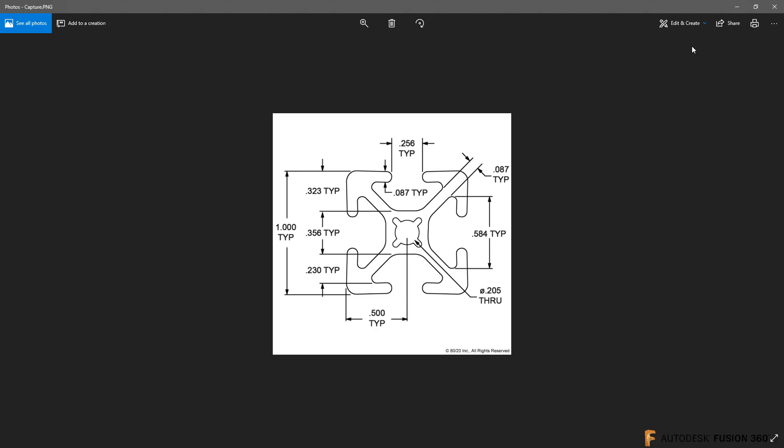So let me close this picture down here. Now, in the past, in my previous life, I would have printed this out on a piece of paper and kind of had it laying next to me. But what I actually prefer today is to bring it right inside of Fusion and use it as a reference. And I would also do that if it was something more - this was just like one view, but if you had multiple views in a 2D drawing, I think I still like to bring it into Fusion.

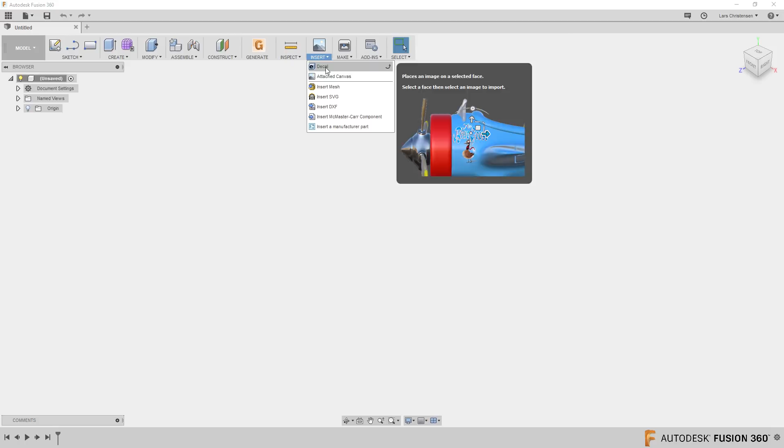So what I'm going to do is I am going to go up to this insert button, and there is an insert canvas and insert decal. Now insert decal is more like a sticker on your 3D model, where canvas is a 2D picture for you to draw something up on it. So let me click on this. And when you get this dialog box, a lot of you guys have already seen this, some of you guys haven't - the first thing that always, just start from the top and work your way down. So the first thing it says is select the face to draw on.

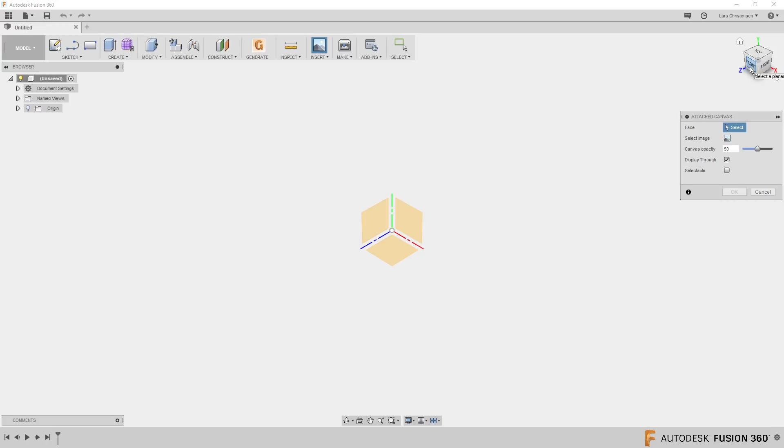And that doesn't really matter. I'm going to select this front face right here. And I call this the front face because I'm following the view cube, right? So I will select that. Then it asks for your image, so I'm going to click on this little picture here. And you will see I have the image that I just showed you - here's the 152 banner, but we're going to do the picture instead. So double click on that. And you will see that shows up on the screen down here.

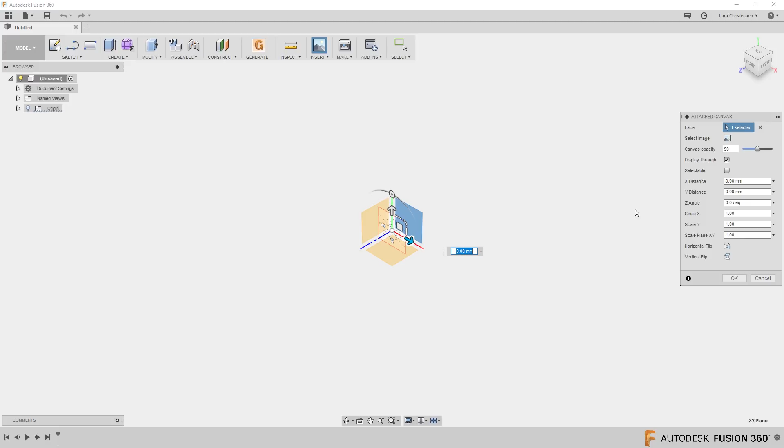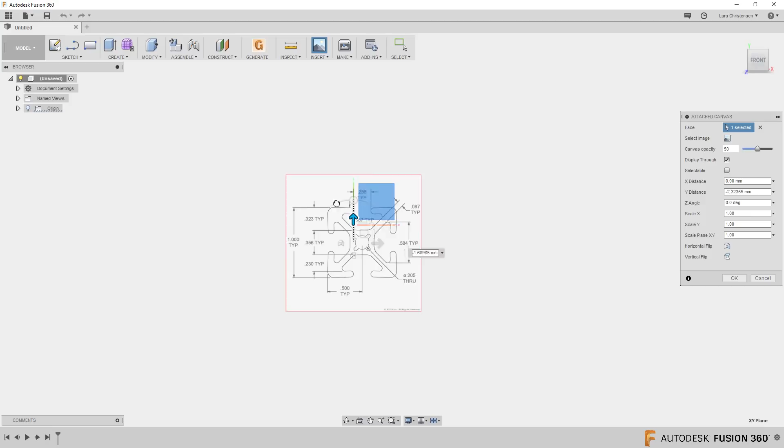Now, another thing that I should point out right now is that you can, let me just click on the front here so we can zoom in a little bit. You can choose the opacity of the image, so how sharp or how opacity should be. I normally like mine about 50%. Now I'm going to say okay, you can scale in here, so you get some handles. You can pull up and down here, you can pull over here. The square will actually let you move it around, or you can scale it on this corner here. I would actually just place it right now. Okay, so now it's just sitting somewhere.

Then I will go over to the left and turn my origin on, because I still want my part to be tied into the origin. You'll see that the origin comes down here. It's a little out of the way, but here's a neat trick.

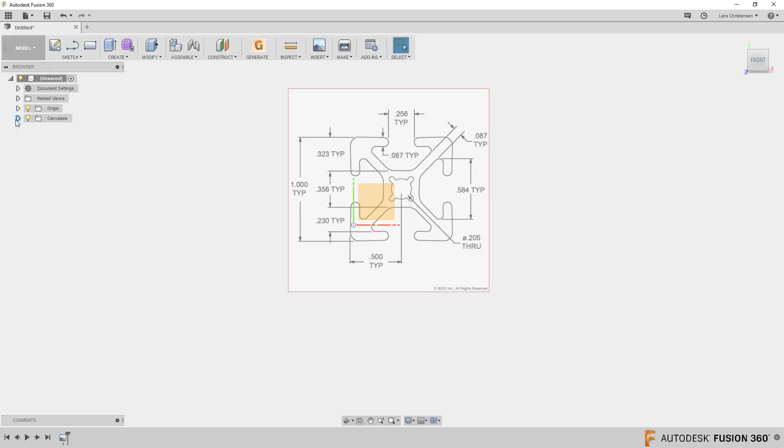If I open this up, you'll see I've got a canvas folder now because I have that image. If I right click here, I get a couple of menus or functions you should be aware of. The first one is edit canvas, which is what we were just in. The second one is calibrate, so I'm going to select calibrate.

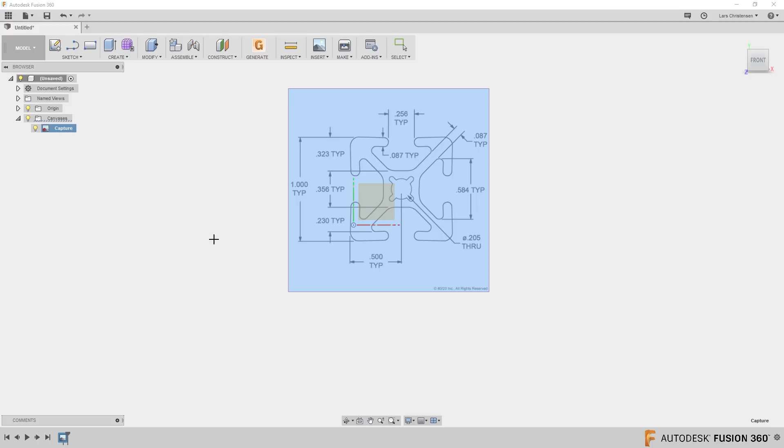Now it's important to say, let me zoom in a little bit, that this image is just an image. It's pixelated, so there's nothing I can pick. It's literally just like a picture. So this calibrate canvas isn't going to be 100% correct, but it's actually pretty neat for me to work with.

So I'm going to move my cursor down to the top of this. You can see we have a 1 inch thickness, or whatever you want to call it, on this rail. I'm going to left click once, then left click down on the bottom here, trying to be somewhat straight down from that original point, and I get a dimension up here.

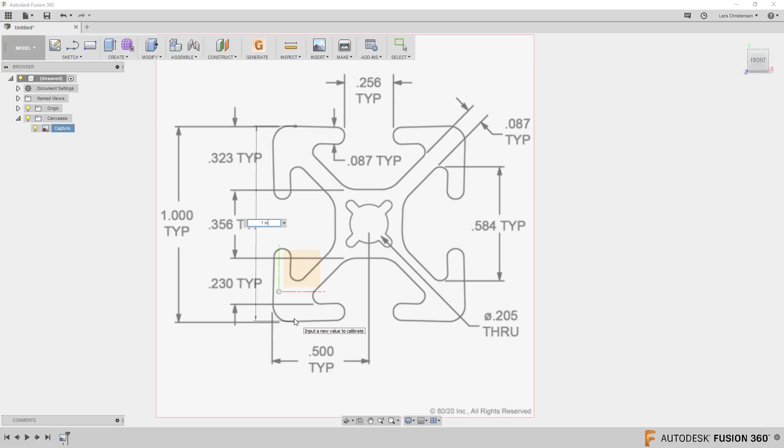Now this is when I realize my template is in metric, but I actually want to do this in inches. Isn't that typical? If you didn't know, you can type 1, then spacebar, then type IN, and it will automatically convert this to inches. So when I hit enter, this scales the image to be 1 inch over where I just clicked with the calibration tool. I hit enter, and you can see how it came right at you there.

So two things: I did that by right clicking and hitting calibrate. And the other thing I just realized is I wanted this in inches, not metric. I normally try to do metric, but for ease, this will be an inches series. If you ever want to change your standard, just click up here on this little icon, and you can change it over to inches, and the whole drawing will now be in inches. Just a little trick like that.

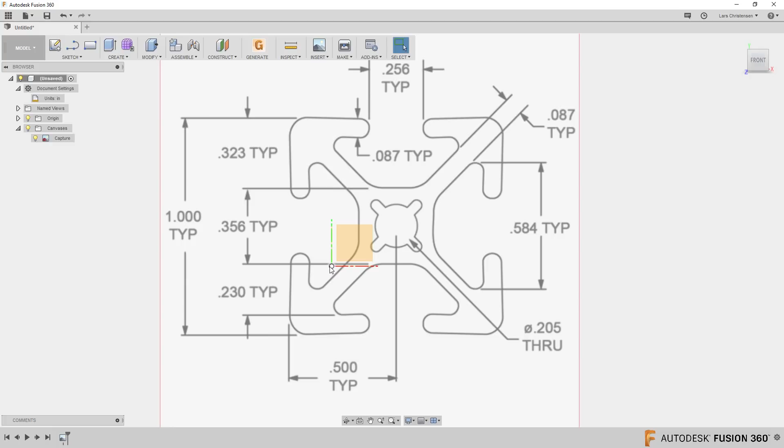Now I still haven't placed this part where the origin is, so I'm going to right click on the image again and hit edit canvas. That brings us back to the menu you saw in the beginning. Now I'm just going to take this canvas and bring it over somewhere where I think it looks pretty centered to that inner circle there. So these are the steps, and I'll hit OK.

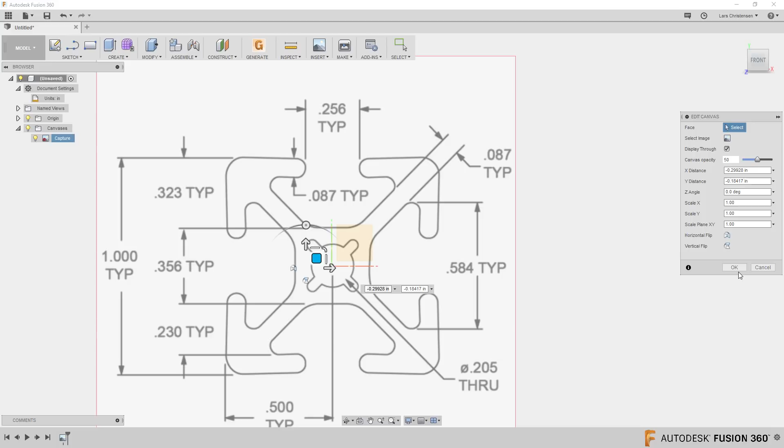This is the process that I use instead of sitting there fighting with a drawing on the table, looking up and down — this is actually a little bit easier. I'll do one later on where there are different views, like a standard 2D drawing. Okay, so we got this.

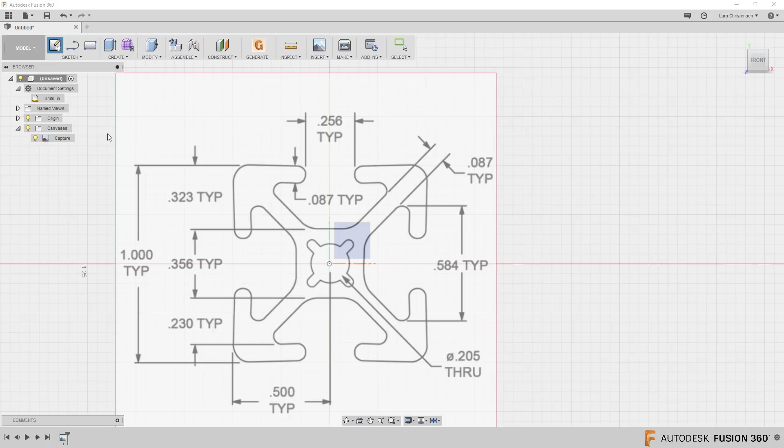Now, the reason I like to bring this drawing in is I can use all these different dimensions as an easy reference. Let's start with the center hole here — 0.205 is the diameter of that. So I'm going to open a new sketch, select that face, hit C for circle, snap it into the origin, draw it out, and type in 0.205 since we get the diameter right there on the cursor. That gives me my first indication of how close I am, and I'm a little off, but that should work okay.

Now let's start talking about laziness when it comes to drawing things up like this. For any of you who know me, I like to be lazy when it comes to CAD and CAM. This was something I didn't pay much attention to in my previous life, and I think I probably should have — and that is symmetry.

We have 4 identical legs on this 80/20, and there's no reason to sit there and fight with all of those.

Let's just draw up this upper right one and then use some of the functions inside of Fusion, like patterning and so forth. So what I'm actually going to do is create 3 helping lines for that.

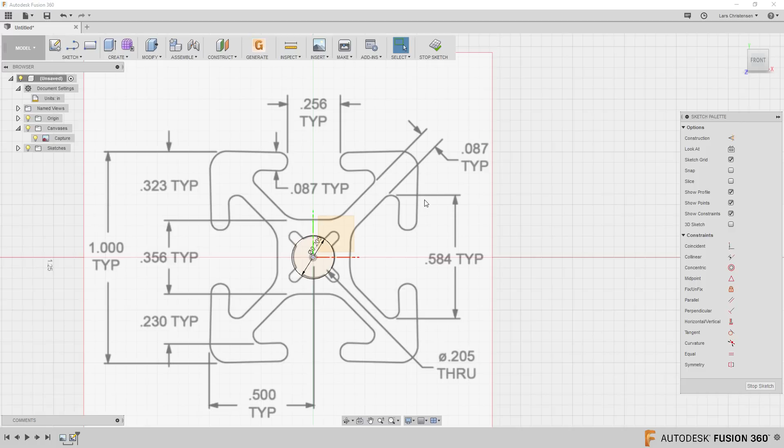I'm going to go up and select the line tool, snap into the origin, and draw a line up, making sure it snaps vertical. I'll double click to end that line. See, now it ended. If I don't double click, the line will continue.

For the horizontal one, I'm going to left click and go out here. Instead of double clicking, if I just do one left click, you can see it's ready to draw the next line. Then I could hit escape, or go down and hit the check mark. But a neat trick is to just double click.

Now, when I come to this line here, I'm going to draw a line going at an angle, 45 degrees. You can see in my measuring box, the blue box, I have the length activated, and a box on the other side for the angle. If you want to switch over to the angle, hit the tab key on your keyboard. That switches it over. I can type 45 degrees, hit enter, and now I have that line.

Let me just hide the canvas over here on the light bulb. So what we have is a line here, a circle, a line here, a line here, and a line here.

Now, if you come from other CAD systems, you would normally turn this into construction geometry because it's not really needed. You can do that in Fusion, but you don't have to. I used to do it all the time, and now I don't bother anymore.

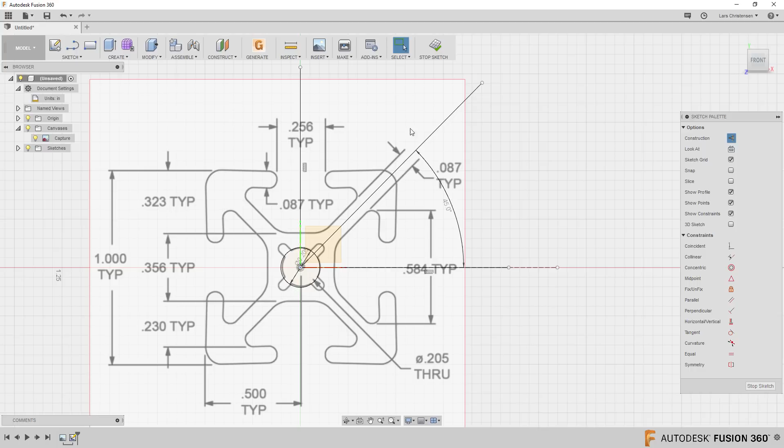But you could go over here and click construction, and turn this line into a construction line. If I hit this one, it doesn't show up... construction... oh, I don't know why I'm not displaying it right now. Hang on... okay, I don't know why it displayed. Well, don't worry about it anyway.

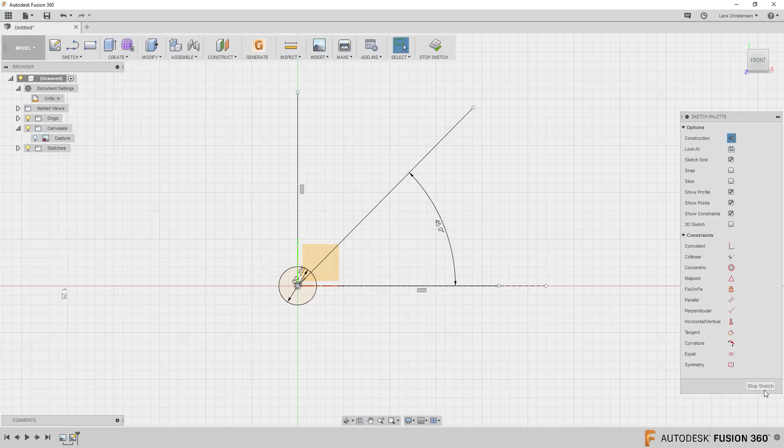You don't need it. Okay, so we got the vertical line here, we got the line here, it looks like this line here. I think this might be a reference to the angle line. I'm not sure. Okay, let's start sketching out here.

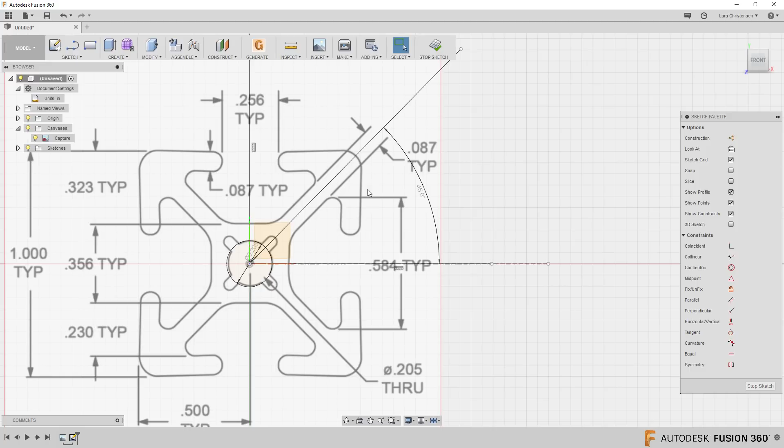So let me show you a couple of tricks with this. I'm going to click, and we're just going to do this right one right here. Let me click the line tool. I'm going to make sure that it snaps into that vertical line we created, and left click once.

I'm going to move out. Now here's a trick. I'm still in the line tool, and you can see I have this line here. Did you know that if you move the cursor back over to that endpoint, hold down the left mouse button, and start dragging, you actually get a tangent arc? But it never goes out of the line tool afterwards. This is something you might want to practice a little bit, but check this out.

So I'm still in the line tool. I move up to about where that radius starts, left click once. Now see here how the line tool is still active. I'm going to move back to the point, hold down the left mouse button, and now I'm actually getting a tangent arc drawn out here. Just get it kind of somewhere close.

I drew another line over, go back again to the original point, hold down the left mouse button, and I'm getting the arc again. So I hope you can see that. Go back over the point, hold down the left mouse button, and you get the arc. This is a quick way, especially for a part like this where there's all these arcs: hold down the left mouse button and drag around to get an arc, move a line up, hold down the left mouse button, and you get a tangent arc.

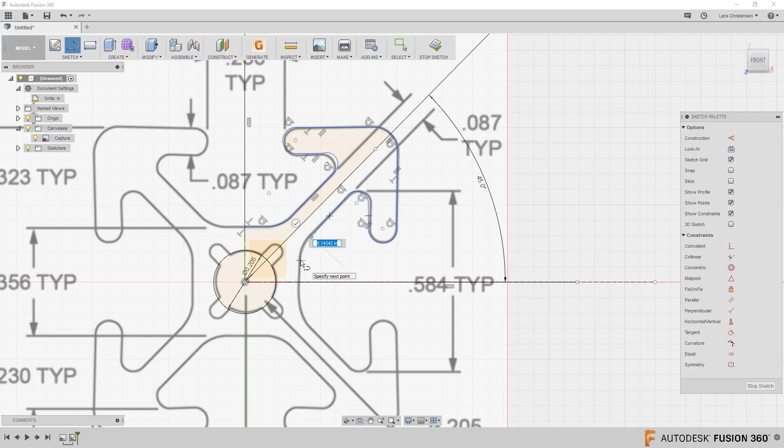Go down to this point here, left click, go back over, hold down, get a tangent arc, and then I'm going to close it off right down here. Now when I say close it off, you might be wondering what I mean by that.

If I hide this picture again, you'll see we have a change of color inside this part versus outside this part. That means it's kind of enclosed, like this light pink area. It's enclosed because we started here and ended down here. I hope that was somewhat visual.

So now we can agree that I drew up this outer shape fairly easily. Now when you've done that, the next thing you want to do - and I'm just trying to get it somewhat close right now - I'll take care of all the other dimensions later on as we're going into it.

My rule of thumb when sketching something like this is to first try to apply the constraints. That's all these over here, and you can see we've got a bunch on the screen before I start doing dimensions. All these symbols you see - if you're fairly new to Fusion, look at all the different symbols over here.

So that will show you what they all are. This one here is actually a perpendicular relationship, meaning this line is perpendicular to this line. Then we have one of the more important ones - that's a tangent one, meaning there's a tangency between the line and the arc.

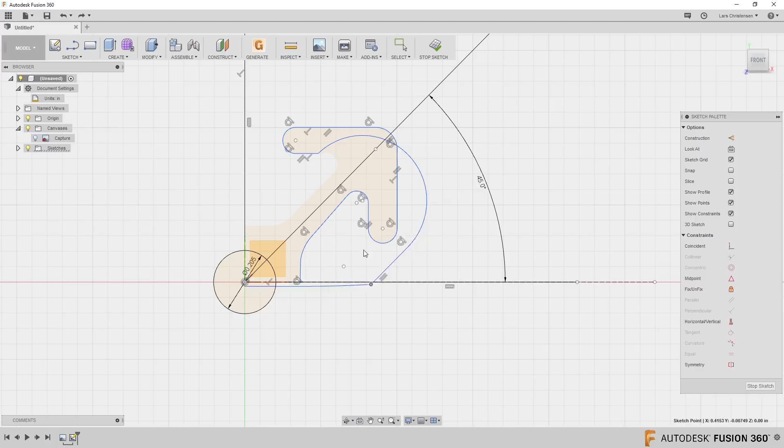Then we do a Control Z to undo that. Same thing, I can see I'm missing one down here. You can see how you place a dimension and suddenly things are blowing up on you. Control Z to undo. So this tangency normally ties that down.

So I'm going to go over here and select tangency. I'm going to select this arc and this line here, and I'm going to go up and select this arc and this line. Normally you have a tangency on each beginning and end of each circle.

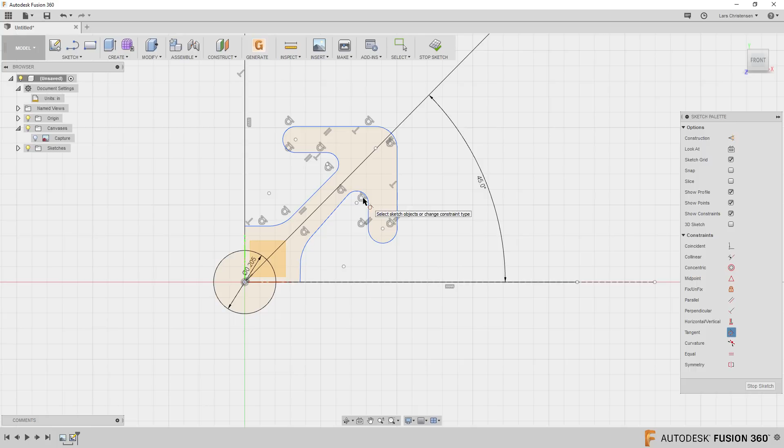So I'm moving around to see if we got all of them, and we're missing one down here. I'm just checking - this arc has this one, this arc had this one, this arc has this one and this one, and it looks like we need one down here also. There we go - that will at least prevent this sketch from blowing up.

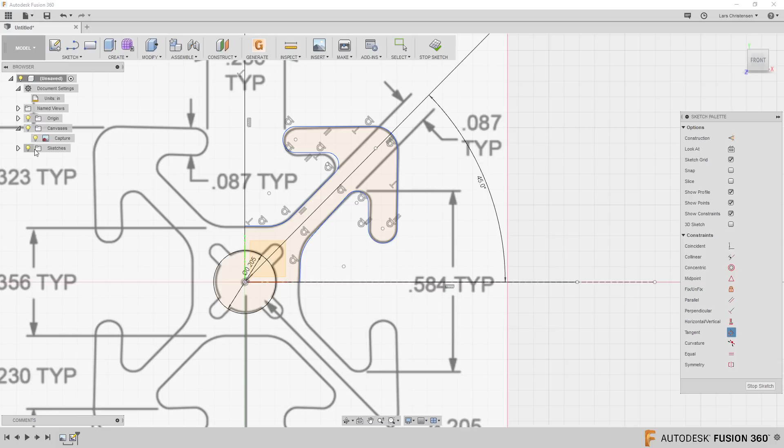All right, with that - I know I need some more constraints, but I'm going to show you a couple of different tips as we go along. Let me turn the image back on, and now we can start adding some dimensions to this. I don't think there's any specific rules for how you go about this, but maybe I like going clockwise around something like this.

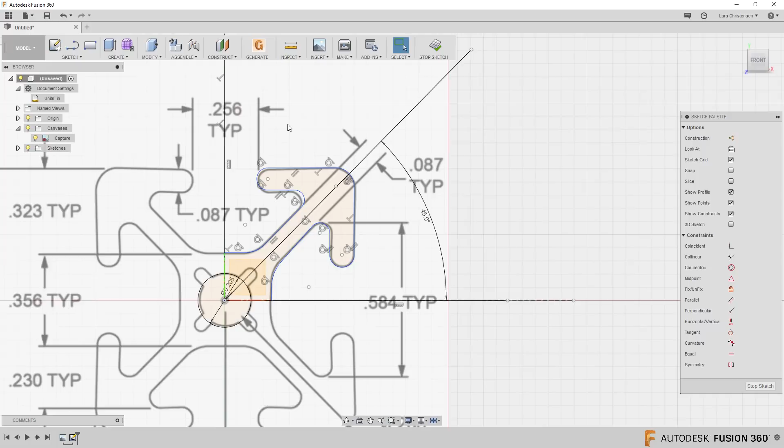So if we start out, some of these dimensions are actually going to repeat. Here we have a 0.256 between the tangency of these two.

If I hit D for dimension, I'm just going to use this line instead. Now if I just place a dimension to this arc, you'll see that it's center to the arc. Let me hit escape to get out of that.

The trick is D for dimension, select this line, then right click and select pick arc tangent, and now it will be tangent to that. We're going to do that a couple times. So here, now I'm going to type in 0.256 divided by 2 because I'm only doing half of this.

Let's continue moving around counterclockwise. So here we get a 0.087 between this line and this line. Now notice something, it might be hard to see, but next to my cursor it's actually showing up as an angle, 176.6 degrees. That's an indication we're missing a constraint to make this parallel.

This line here is, as a matter of fact, at an angle. So what we could do is create a parallel relationship between this line and this line. Now if I hit D for dimension and click here, you'll see we get something that looks more like what we're looking for, 0.087.

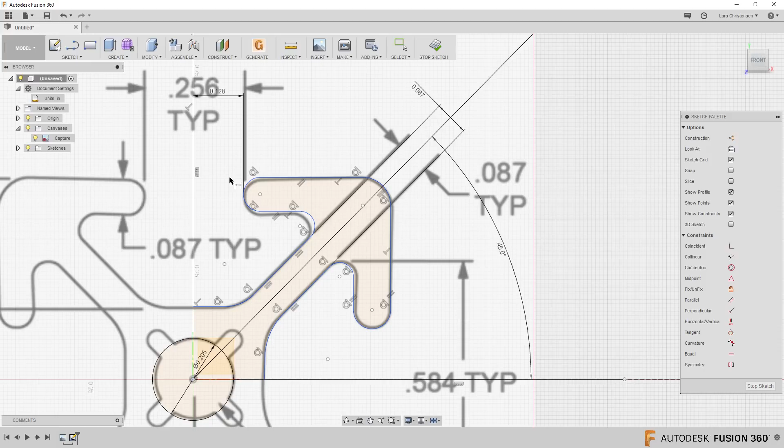This is another reason why I like to use the drawing in here—if I sketch to the drawing, everything should be fairly close to everything. All right, next one here is this 0.584.

We're going to do the same thing as before. We'll click on the horizontal line here, right click and select pick tangent so I can select the tangency of that arc. I'm going to type in 0.584 divided by 2 because I'm only drawing half of it. So now that dimension is there.

We can zoom out a little bit again. We already did that through hole—that's the first thing we took care of.

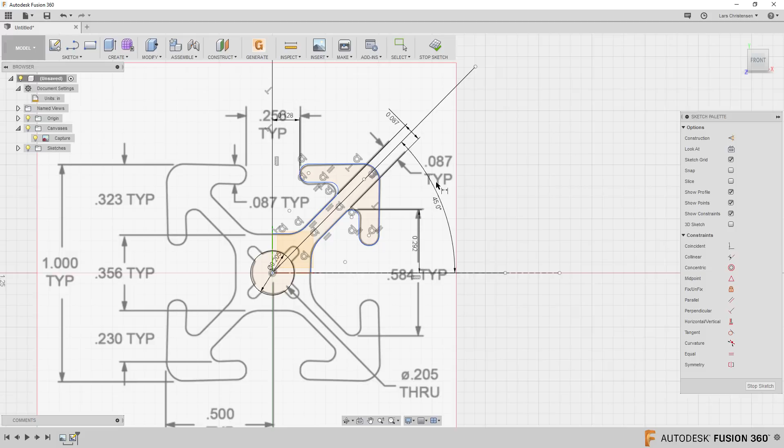Then we have a half inch from the center here out. That would be from this to this line here. I might just draw that out here—make that 0.5, hit enter.

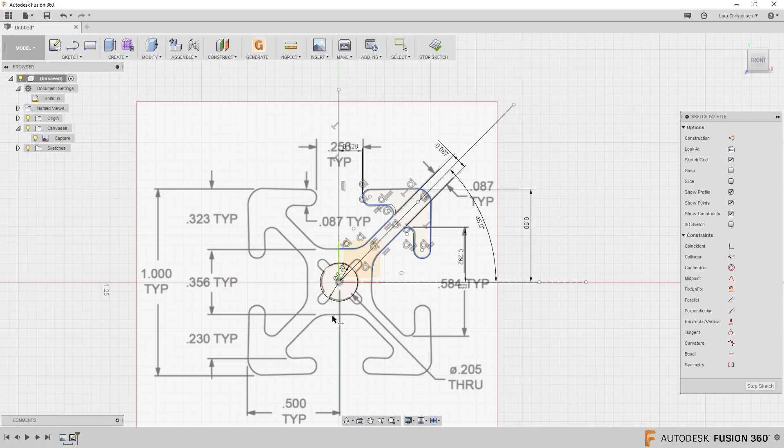Next, if we're moving around here, we have a 0.23. If you're looking at this, it's the distance from this area up to the top. So we can go in here, click here, go up and click on this area, and place that. So that's a little high.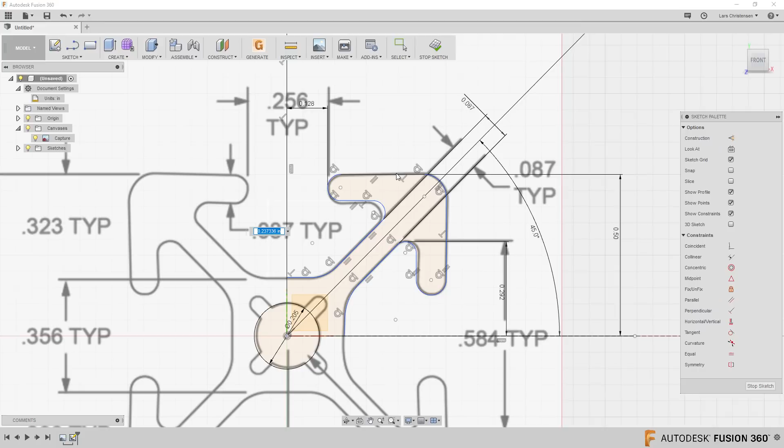Oh look at this, I got the wrong one—not to the outside, it's to the inside. Escape. This is one of the reasons you could go ahead and say D from here to here. What was it again? 0.23—got that one placed there.

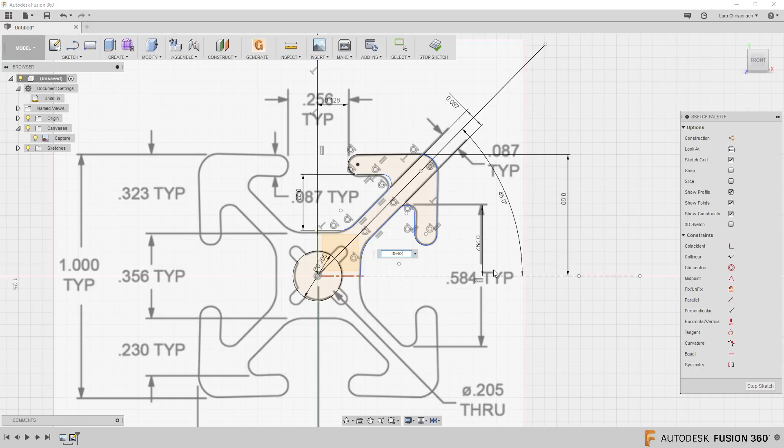That's good. Now the next one here is actually from this line, this one over here, the 356, to this line. That is going to be 0.356 divided by 2. And as soon as I did that, notice how this whole section here is now black.

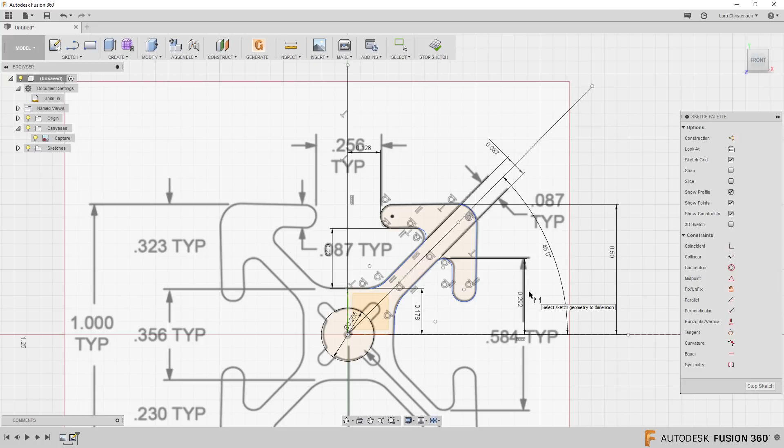That has now been fully defined, where this section over here is still blue. Okay, so now when I'm looking at this, I can start saying, since this is fully defined, that means some of these dimensions probably also play very well with the other side here.

If I place this, it's a degree, it's an angle. That gives me an indication that something is not right. That was what I just brought up before.

So I'm going to delete this one and say, you know what, this line here probably—I don't know if it's actually vertical. It probably is not. Let me go ahead and create a vertical relationship to that one. Let's hit D for dimension from here to here.

And now you will see we get a dimension. Now what you could do, instead of typing in 0.23 to make this the same, you could go up and click on this blue one, and you will see that it changes to D8. If I hit enter, you get a symbol called FX 0.23, and all that means is that this dimension controls this dimension. What that means is if I change this to 0.2, that dimension will update also.

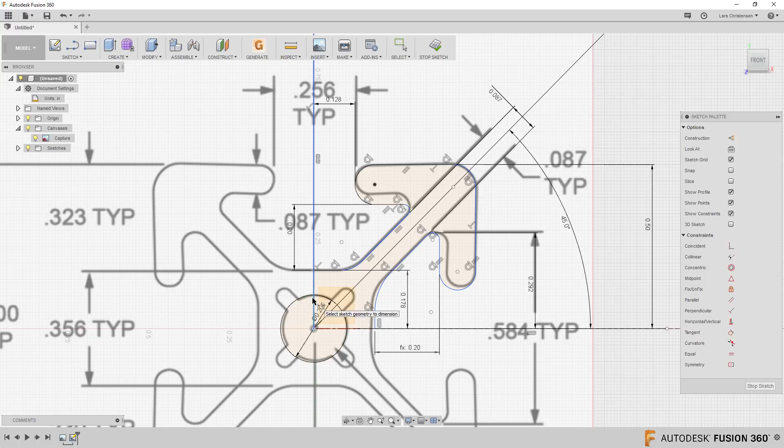So this can be a good way when you're modeling things up. Let me just hide the canvases for a second. This can be a good way when you're modeling things up. I change this to 0.23, I hit enter, and this one will update too. This is a good way of assuring that when you update, you only have to update one dimension, and others will update if you know that they're going to stay in the same row.

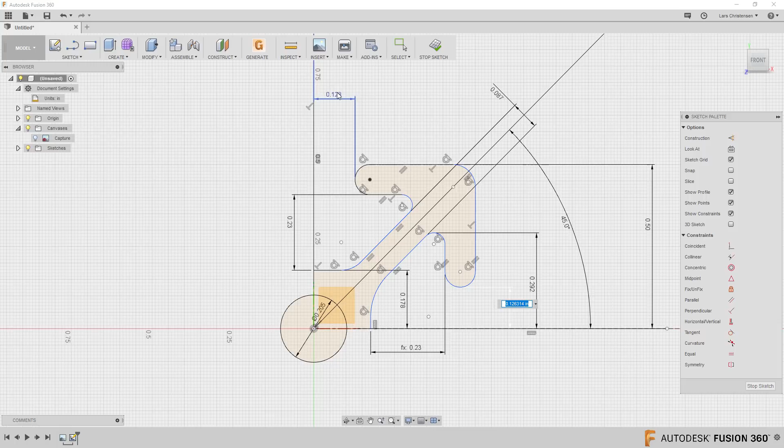That could be, if we continued with this 128 - if I do this dimension here, right click, tangency, select this tangency here, I know this dimension is going to follow this dimension. I can click on that, it changes to D3, and I hit enter. Now these two dimensions are controlling this one and this one. So I hope that this somewhat makes sense as a way to control this.

Same thing with a 1/2 inch - we can go over here and click this edge, that's also going to be 1/2 inch. You could go over again and click on this one over here, and you see that it becomes D6. That's just another way to try to control these types of dimensions. Okay, I hope this is useful.

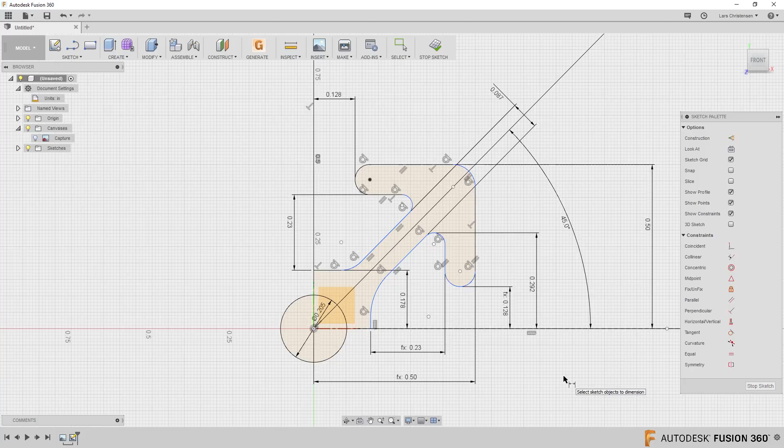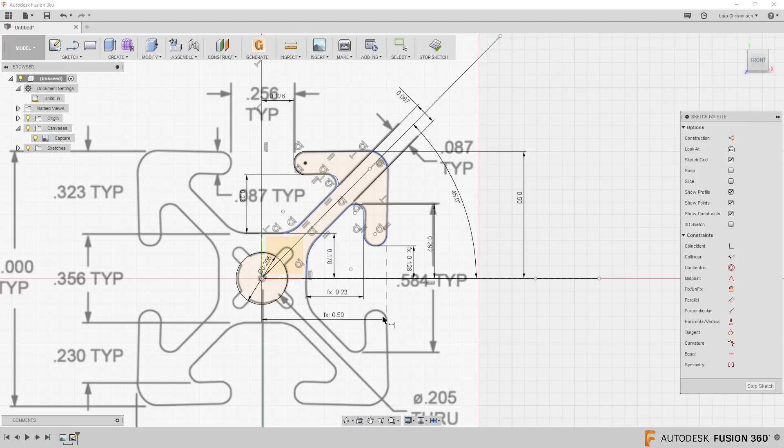Now I'm not sure I'm missing something. Did we ever do the 323? I'm not sure if I need that one to get it fully defined. I don't think I do - I think I'm missing one other dimension. So if you're ever unsure, you can always grab a corner here and start moving it. I think everything is blue right now because I haven't fully defined the radiuses. So let me just undo there, and let's put some dimensions on these radiuses.

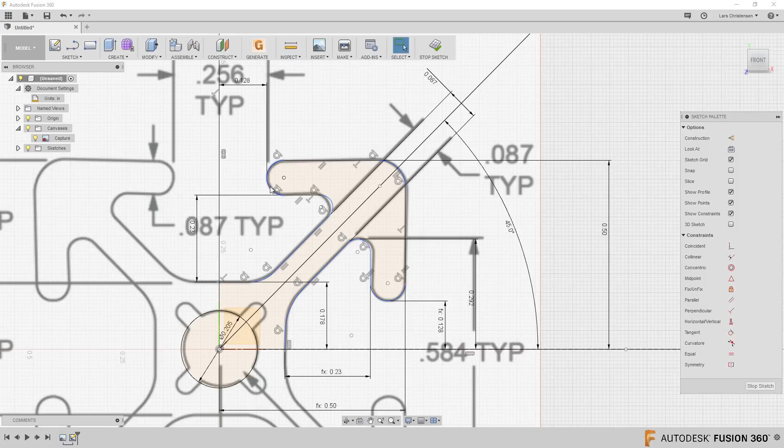Now these radiuses are actually not defined on our drawing, but I'm going to make a decision that since this is a full radius, and I know that thickness - shown right here - is 0.087, that's the width there. This is a full radius, so I'm going to determine the other ones are the same. I'm going to hit D for dimension, click here, and it's going to place a dimension out here. Now if I wanted to make that be 0.087, like the same as the width, I could just click on that, and that radius will be tied into that.

I'm going to make these here - I'm going to make this one, click on this radius here. I'm also going to make that one 87, and I'm going to click this one. I'm going to make that one 87 too. Oh, I see I am missing a dimension, it looks like right here.

And then the two inner ones, I'm going to continue with these - I'm going to make these half of that. So I'm actually going to click here, place this one, select the 87, but then type right in the dialog box 'divided by 2.' And I can select this one, divided by 2. Now this here will control that.

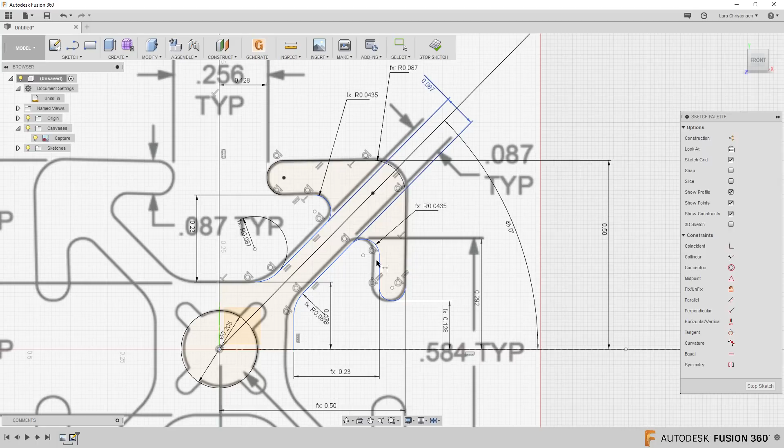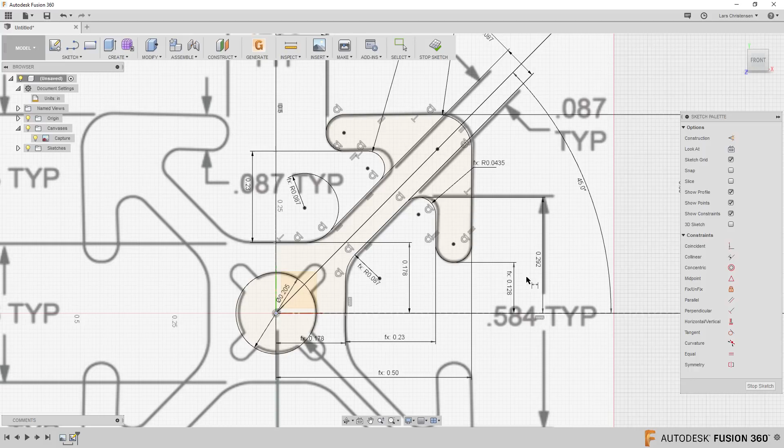Now, as I did all of this, I noticed that I am missing something - I am missing this dimension here. It looks like I'm missing that over on this side. So, D - select this to here. I'm going to have that the same as this one. And now it looks like I finally got it - that was the trailing dimension. Now it looks like I got a complete black sketch, which tells me it's fully defined.

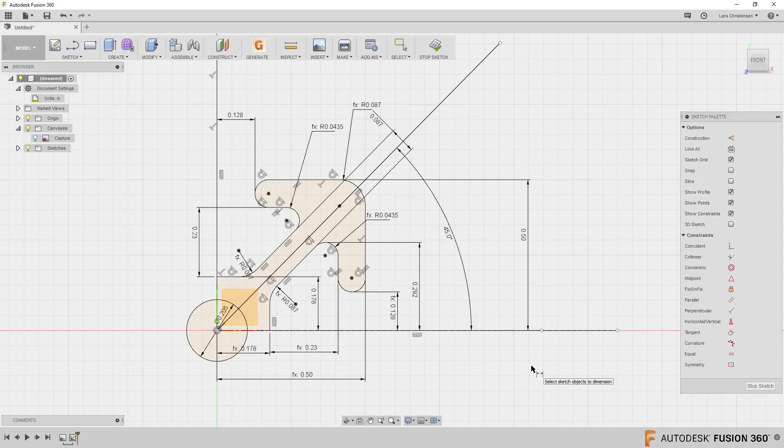If you wonder why we have some arcs here, this is just the dimension leaders for the radius - so if you move that down there, that will show up there. One last thing I will do to the sketch - and this is maybe a little bit of OCD, or whatever you want to call it - is you could always go in here and clean these dimensions up a little bit, especially if somebody else were going to work with this at a later point.

And maybe it'd be nice for them that things looks a little bit more cleaned up here. So this is kind of how I would use the sketch tool, and I hope that this was useful for you guys to see how I would draw this up and get to this result, fairly close to what we had on the drawing. It looks like it's a little bit off here with my radiuses, maybe, I'm not quite sure.

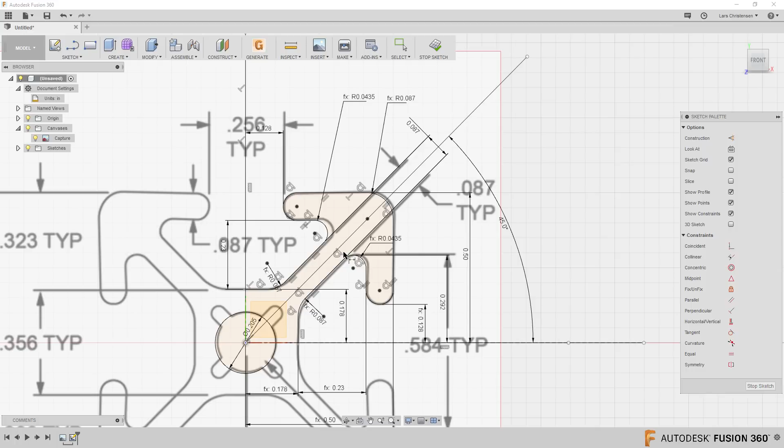Now what I would do then, this would be my final sketch. Now you have a couple of options. You could go in and use a circular pattern in the sketch dialog box and pattern this around. So if I go in and click here, you got to select your objects. Let me just highlight everything. So now everything is selected. And then you got to select a center point. See, there's 45 selected entities.

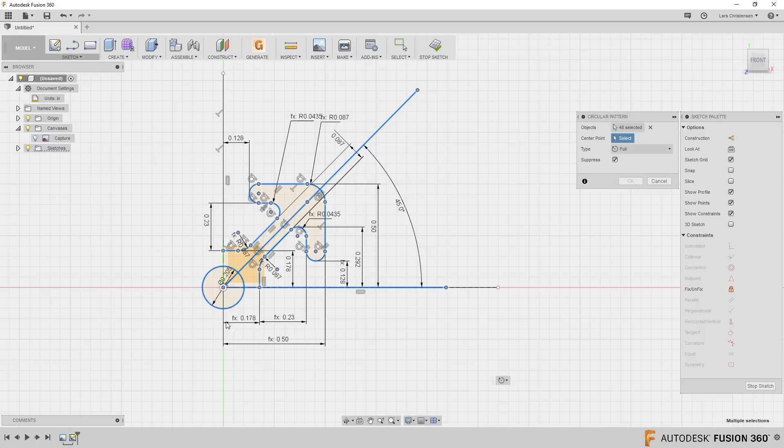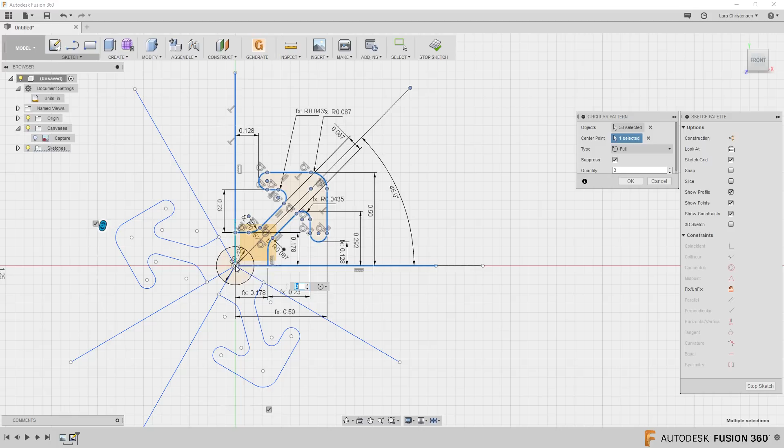Center point is going to be right there in the center of this one. Oh, maybe I can't do the whole thing. So like all this plus these here. Select the center point. There we go. And I could make 4 of these, and hit OK. And you will now have one created here that contains all the different dimensions, and all these here are just copies. That's one way you could do this.

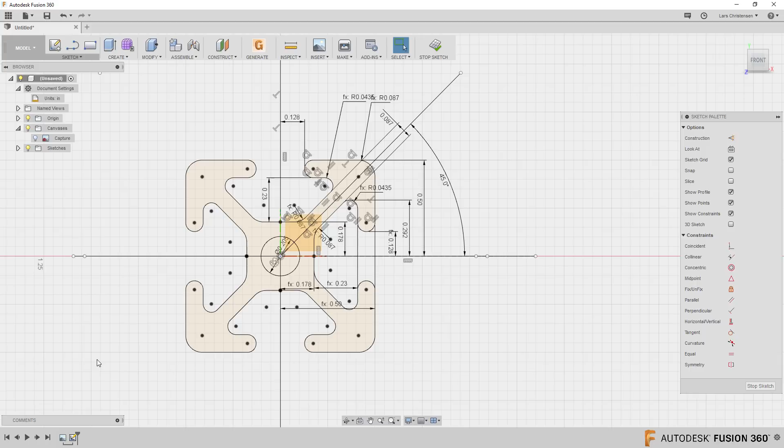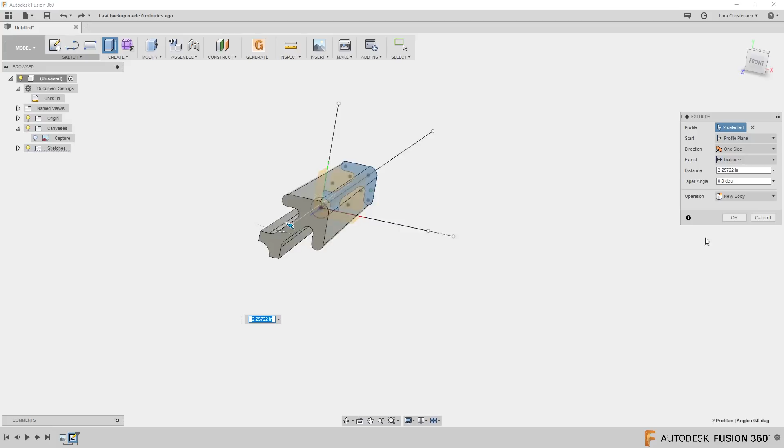Now this is actually not too bad, but somebody could consider this being a little overwhelming, especially if you have something really complicated. So instead I'm just going to do Control Z to get back to this. Another thing you could do was you could actually extrude it from here. So if I go into the extrude command and select these two halves here, I'll move the image here, and we could draw out that section. See that? Hit OK. So now we have that section.

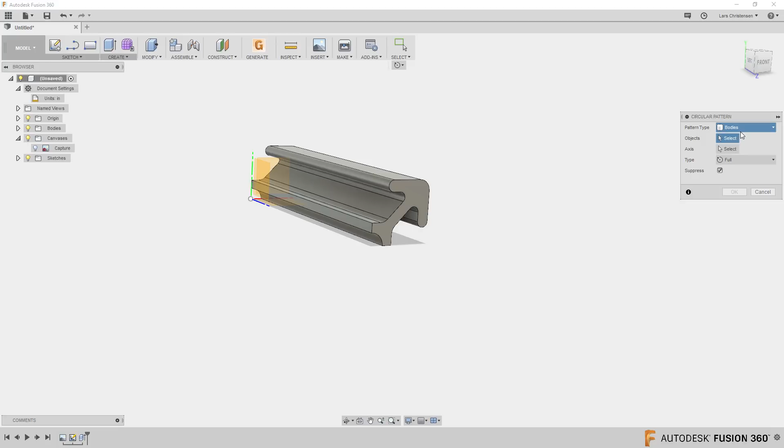We could do the same thing we just did in the sketch environment. We could go down to the patterning function under Create instead of Sketch. Go into a circular pattern. In this case, I wouldn't select faces, I would select this body, this here. And then we could do the same thing, select an axis instead of a center point. Do 4 of them, hit Enter, and we would get this here. Now, the only thing if we did it this way was that we would actually end up with 4 bodies together, the way I did it here.

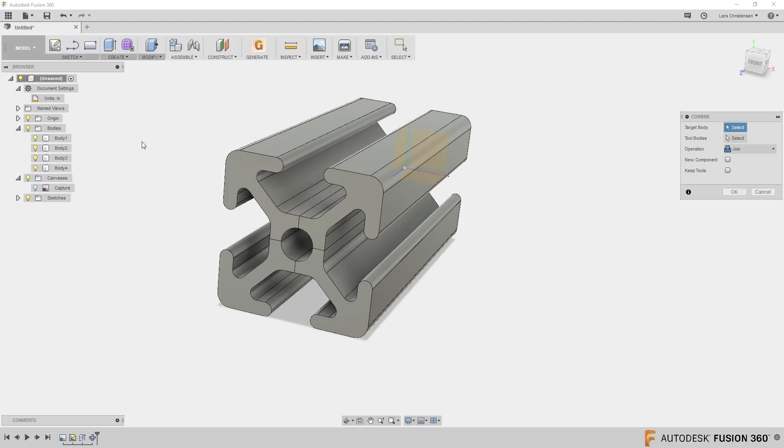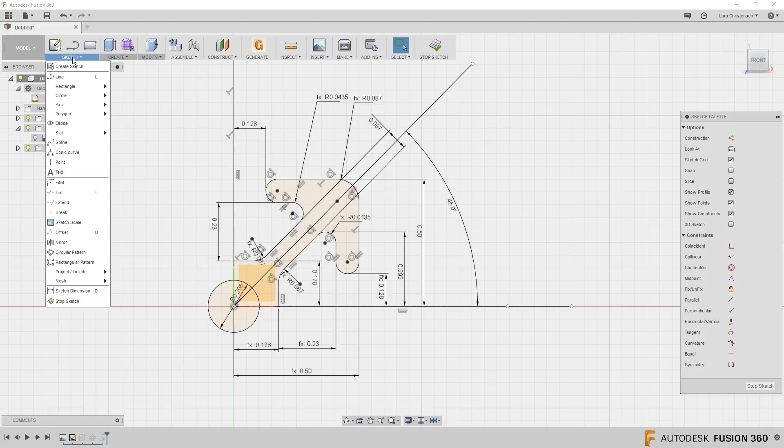Now, you could of course always use one of my favorite commands. Go into Modify, go into Combine, and you could click on all 4 pieces and have join selected, and now they are all one body and good to go. But my point here is that if you go back into your sketch, right click its sketch, you have everything you want drawn in one, and then you send it around like that. So I think this is an interesting way to do this, and I actually think that the circular pattern inside of the sketch environment is probably just as good as what I ended up doing here, where I used the pattern within a feature.

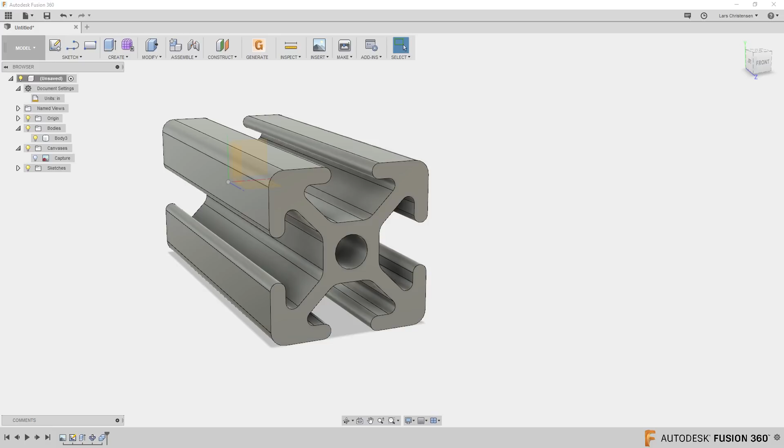So that was all that we had planned for today. I hope this was useful. A little bit of basic sketching, right? And getting in there. But it is funny because I think I have a tendency to forget about the sketching environment, and that is important, because every sketch, or every 3D model, has a sketch in it. So it should definitely be something we chit chat about.